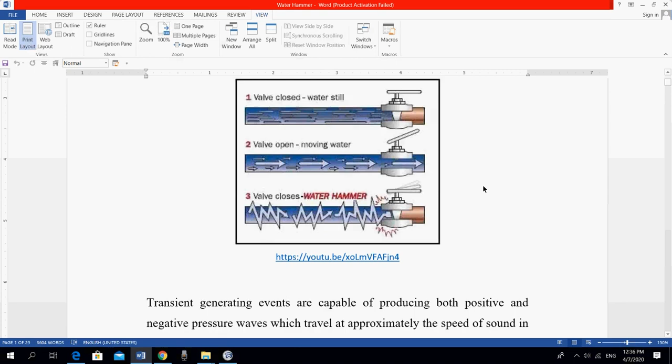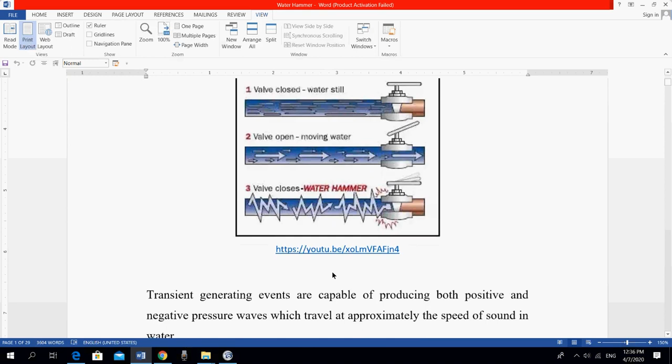You might know that most liquids are incompressible, or at least barely compressible, which means no matter how much pressure you apply, their volume doesn't change. This can be really useful, like in hydraulic cylinders, but that lack of springiness can also lead to catastrophic failure of pipe systems. Hey, I'm Grady, and this is Practical Engineering.

On today's episode, we're talking about hydraulic transients, also known as water hammer.